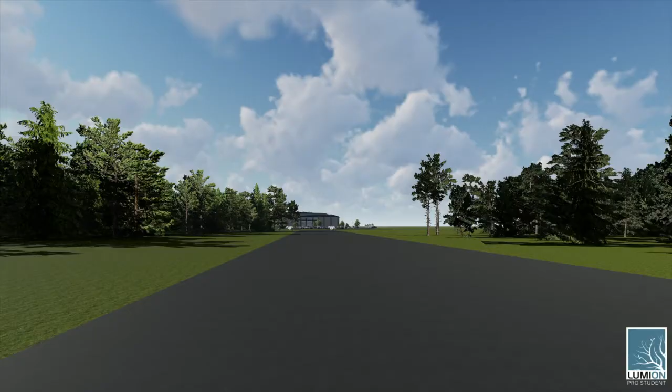The overall scope of this project is to design the facilities required by the client, Space Perspective Incorporated. This includes a 120,000 square foot hangar/manufacturing center and a 7,000 square foot headquarters/exhibit space. These facilities were designed with just the right dimensions, specifications, and building code requirements such that the client may proceed in their latest venture with a set of strong, stable, and LEED certified buildings.

Space Perspective wishes to send space-worthy passenger balloons into low orbit, roughly 100,000 feet above sea level. This is over double the height of standard commercial flights, an altitude so high that only a select few people in history have had the privilege to see it with their own eyes.

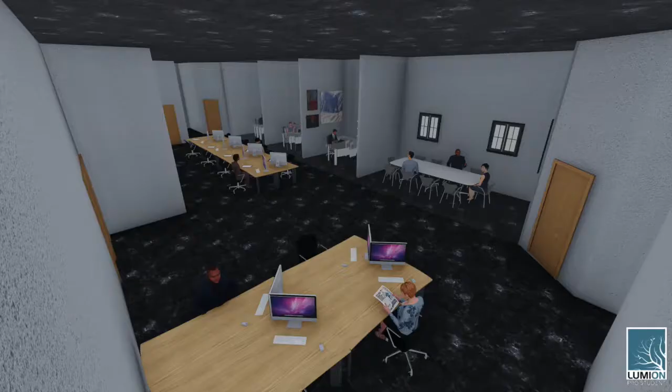Here you can see a proposed layout of the headquarters interior, complete with a dedicated office area, ample room for exhibits to be placed and moved as the client sees fit, as well as some amenities for the balloon manufacturers.

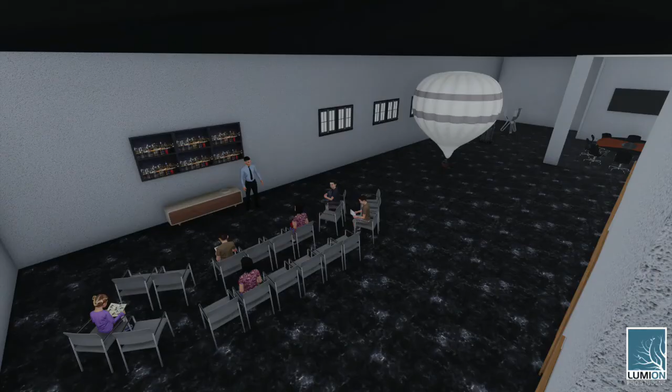The second story is dedicated to visitors who may come in and view the manufacturing process in real time. Access to the hangar, observation walkway, auditorium seating, and room for even more exhibits can be found here, as well as a small conference room by the emergency stairwell.

Next, we move on to the structural design for these buildings. For the hangar, we've implemented Vulcraft 80 DLH-19 members to fulfill the load requirements for the roof. All columns on screen were designed with W12 by 190 steel and equal dimensions to the largest column bearing capacity in the system, as to simplify and expedite the construction process.

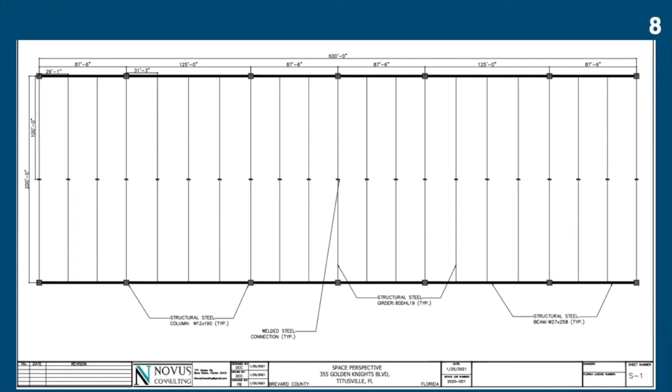Likewise, the beams were designed with W27 by 258 steel. And as for the headquarters, a system of two-way concrete slabs, reinforced concrete beams, and columns shall be used to help maintain the building's structural integrity. The slabs were designed with thicknesses of 6 inches for the first floor and 8 inches for the second.

There are 2 different column sizes present in the design, 6 of which are 36 by 36 square inches, while the rest are all 24 by 24 square inches.

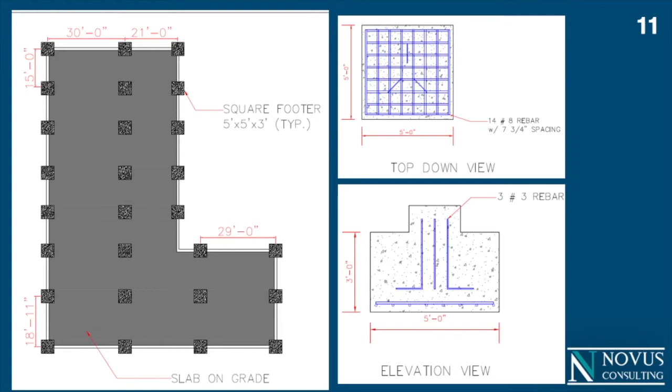For the headquarters, it was determined that 5 by 5 by 3 square footers were needed to support the column loads. The exterior walls will be supported by a 2 foot wide by 2 foot deep strip footer. All footers have steel reinforcement spaced throughout, the dimensions of which are also shown.

This is a working EPANET simulation of the piping network for our proposed facilities. There are 48 fixtures total, including toilets, sinks, urinals, showers, and drinking fountains, all of which have been tested to run above 25 psi.

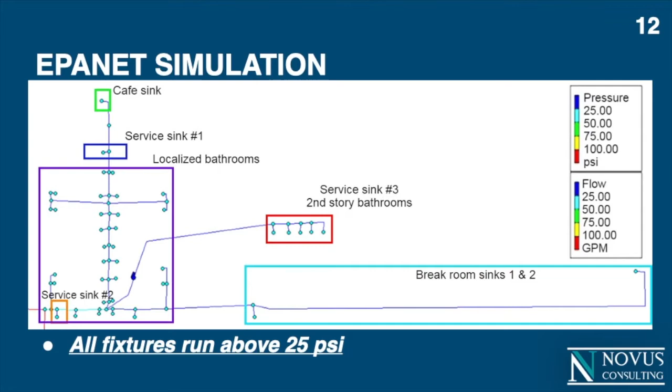All bathrooms have been localized to one corner for efficiency's sake, with some minor additions here and there as needed. In this red box, we see all of the second-story fixtures, which are located directly above the office bathrooms.

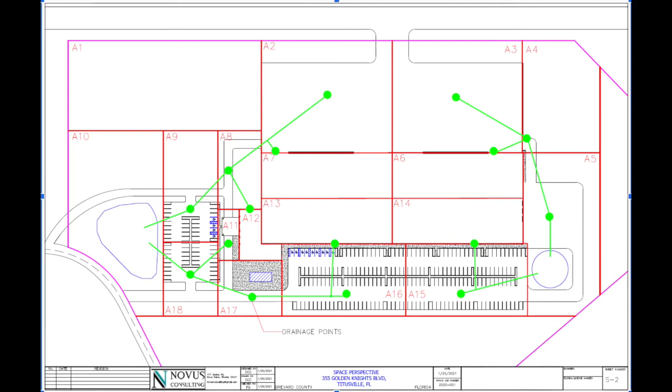Here we have our working VISSIM model of the site and its surrounding arterials, South Washington Avenue, Columbia Boulevard, and Grissom Parkway. Speed and vehicle flow data gathered from RITIS and FDOT respectively has provided the NOVUS team with enough information to accurately project the rush hour traffic conditions that might be seen upon Space Perspective's grand opening.

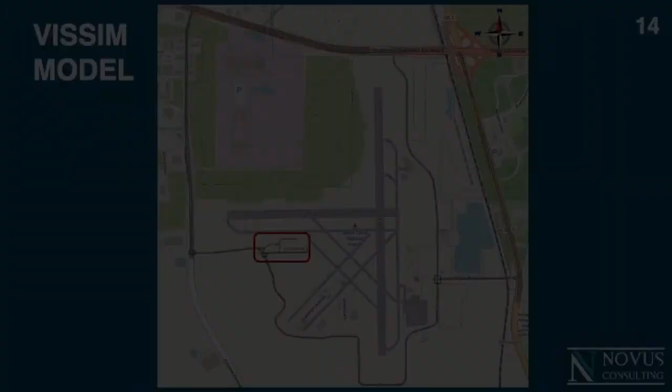The orange arrows indicate vehicle movement, meaning this north intersection is entrance only, while this southern one is for entrance and egress. As you can see, level of service stays at B or better even during peak traffic hours, with queue lengths averaging less than 10 feet for each entrance point.

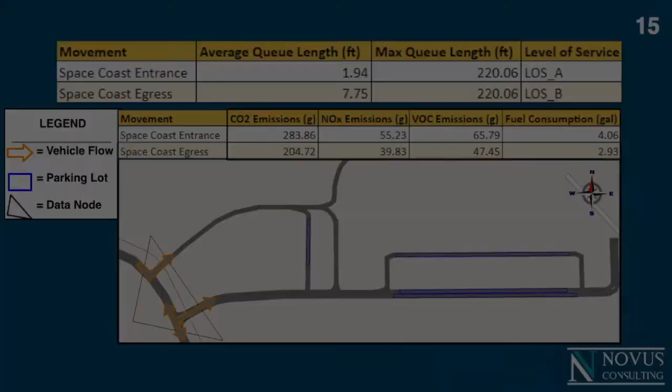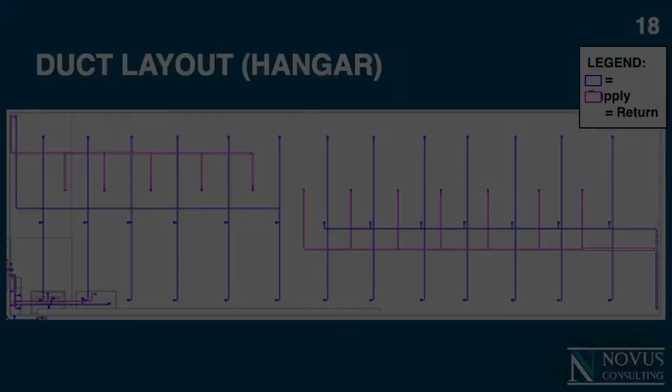This is our proposed landscaping plan. We kept it simple by design, with only 3 types of plants total: about 116,000 square feet of Argentine Bahia sod to surround the facilities, silver buttonwood trees for each parking lot island, as well as some blanket flowers for the walkways in front of the headquarters.

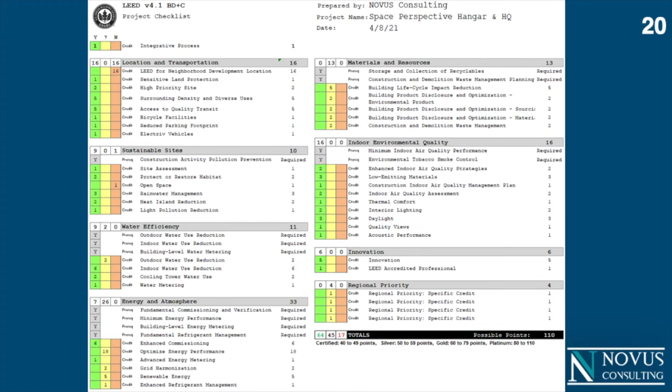We at NOVUS Consulting are committed to a green design, and so we have followed the techniques and practices outlined in the LEED Manual version 4.1. I'm pleased to announce that we have clinched LEED Gold, with more than 60 points under our belt, as shown in this LEED checklist for new construction.

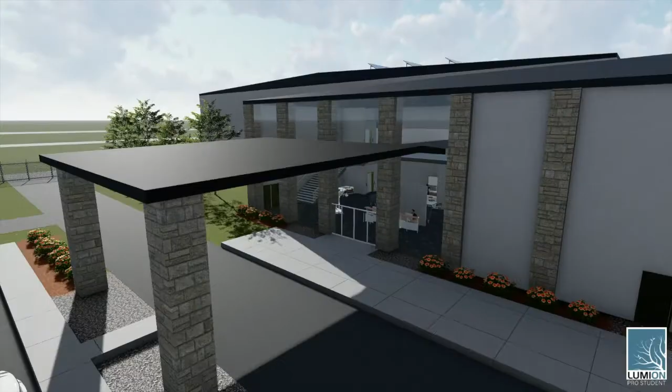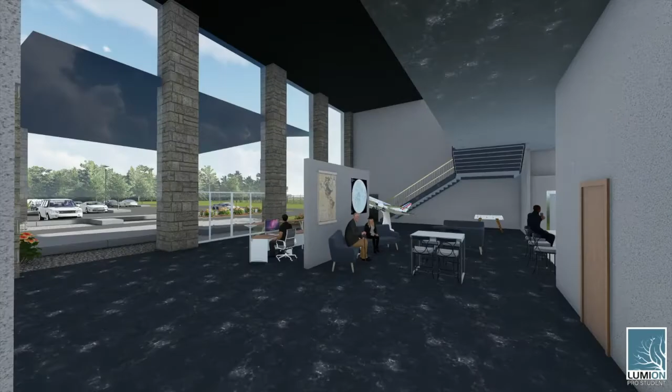In conclusion, we at NOVUS Consulting believe that the future of humanity can exist among the stars. If the human race is to survive the threat of climate change, we must adapt to life in outer space as expediently as possible. To facilitate this effort, we have delivered Space Perspective with the facilities they need to fulfill their mission safely and effectively. NOVUS is confident that the completed project showcased today displays our continued commitment to a job well done.